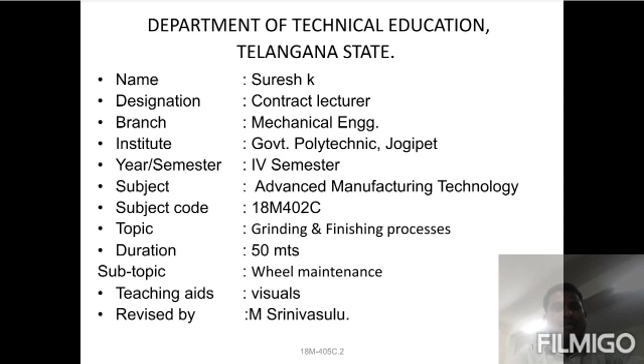Right now we will discuss the remaining topic in grinding. An hour before, we already discussed the maximum amount of this topic. Once more, we can check the entire topic again.

In the previous class, we discussed the grinding wheel, grinding wheels, and work holding devices. What are the work holding devices we used? Right now we will discuss the remaining topic of grinding wheel.

So first, an hour before, let's recap our topic. What is the work holding device? The work holding device plays a main important role in the grinding operation, because it maintains the work in a constant place for some amount of time during the working process, avoiding tilting and helping to produce correct surface finishing. That is the main important thing.

Right now we will discuss the types of work holding devices. First one is vices, second one is magnetic chucks - among magnetic chucks, one is electromagnetic and the other is standard type. Then long cylinder bars are also used to hold the workpieces, and centers are also there - one is the live center, second is the dead center. These are the main work holding devices.

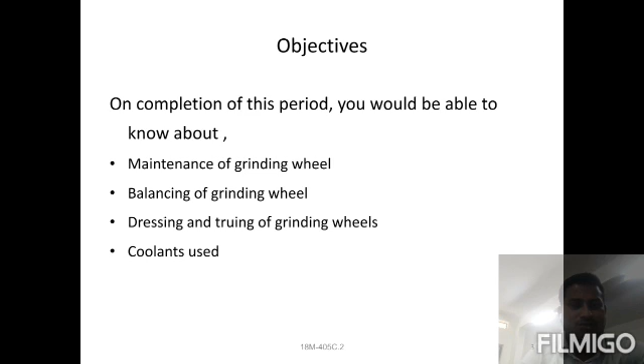First is the maintenance of a grinding wheel. What is maintenance? First, it is to improve the cutting capacity. Whenever cutting capability is reduced due to continuous usage of any grinding wheel, the cutting capacity will be decreased.

To increase the cutting capacity, maintenance improves the efficiency and life of the grinding wheel. This is done by removing the already used type of abrasive particles, which improves efficiency while revolving continuously, and at the same time cools the entire workpiece during the working process.

Next is to run the grinding wheel with concentric speed on the spindle. The grinding wheel is placed on the shaft or spindle, and while working it should revolve in a perfect way. This is the best example.

Consider a four-wheeler vehicle - after long usage of a car or motor, whatever it may be, what do we need? Wheel balancing is important. Wheel balancing or wheel maintenance is required for the wheel to rotate properly for the driver. The same principle applies here - we run the grinding wheel with concentric speed on the spindle.

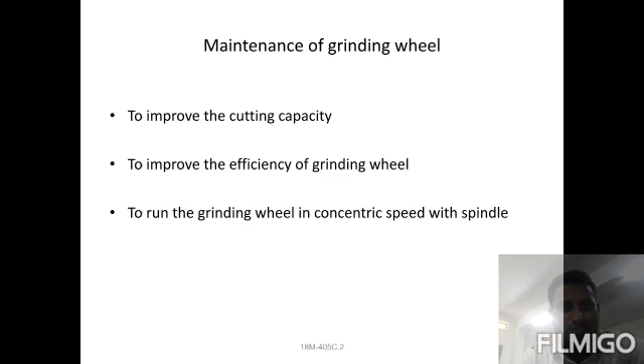Next is balancing of the grinding wheel. What is balancing? It is to prevent vibrations at high rotary speeds. The grinding wheel always revolves at high speed, so we need to prevent the vibrations that are generally developed in every machine, but we need to avoid them at high speed revolving.

While in the working process, the grinding wheel rotates at very high speeds. At that time, we need to avoid the vibrations and prevent them.

Then, to prevent waviness in the work surface - during the working process, some amount of waves will be created, along with uneven surfaces, uneven lines, or scratches. So to avoid that, we prevent the waviness of the work surface.

Next is to prevent the wheel from breaking. When does breaking happen? Due to continuous long usage and applying maximum force on the workpiece with the grinding wheel, there is some chance of the grinding wheel breaking. So in this process, we need to prevent the wheel from breaking.

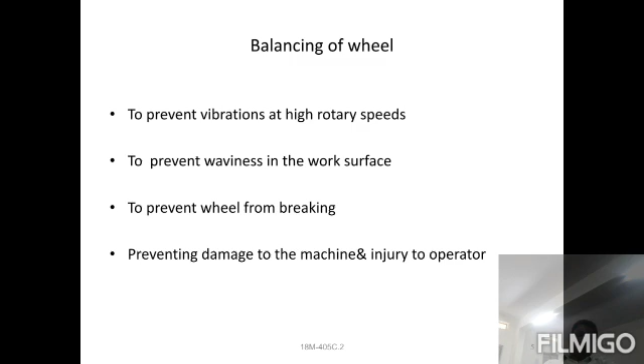The second one is balancing of the grinding wheel. A wheel is said to be balanced if its weight is uniform throughout. The weight of the grinding wheel is uniform throughout its entire body. The grinding wheel is provided in a round circular shape, with the maximum amount of material deposited in the manufacturing process. So a wheel is said to be balanced if its weight is uniform throughout.

If its weight is uniform throughout. If some portion of the wheel is heavier, then the wheel is said to be unbalanced. So we are discussing, is it balanced or unbalanced? If some portion of the wheel is heavier during manufacture, then the wheel is said to be unbalanced. So in this connection, balancing is the most important thing. That's why we consider this method.

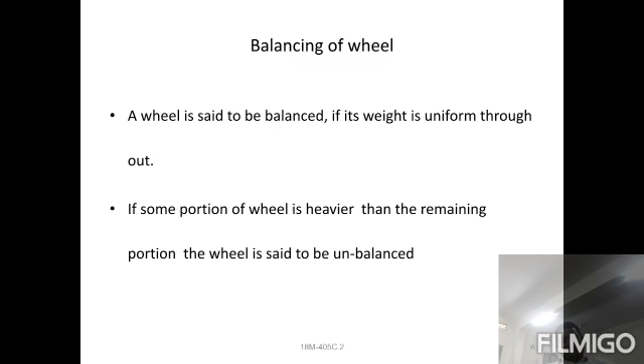Next, what are the methods of balancing? First one is adding weight in the form of lead to the light side, right? So to remove the chances of imbalance, add weight in the form of lead to the light side. Next, adjust the segments attached to the inner sleeve.

If the grinding wheel is unbalanced, we go with adjustment of segments, which are nothing but separate parts, separate attachments. We attach them to the inner sleeve of a flange. The grinding wheel consists of a sleeve and a flange, and the segments are attached to the sleeve of the grinding wheel.

Then, large wheels are balanced by pressing with rubber washers and flanges. So if large wheels are there, balancing of heavy-size large wheels is done by pressing with rubber washers and flanges. Flanges are used and rubber washers are provided.

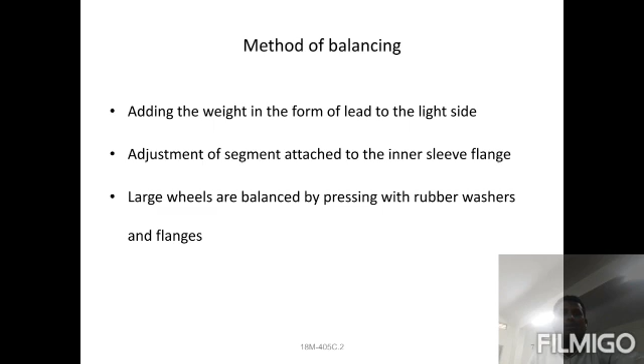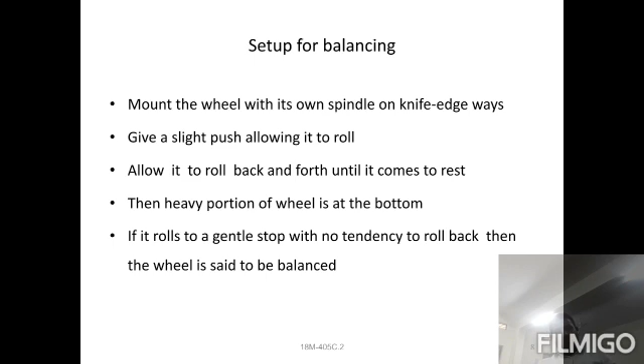Next one is how we set up the balancing of a grinding wheel. First, mount the wheel on its own spindle on knife edge ways. So mount the grinding wheel on its own spindle, provided for that grinding wheel, on knife edge ways. A separate base is provided for balancing purposes, with knife edges that are both parallel, right?

Give a slight push allowing it to roll on the knife edges. Allow it to roll back and forth until it comes to rest. Give a little push to the grinding wheel. It will move, then come back until it comes to its rest position, after we give some force to the grinding wheel with the help of its spindle.

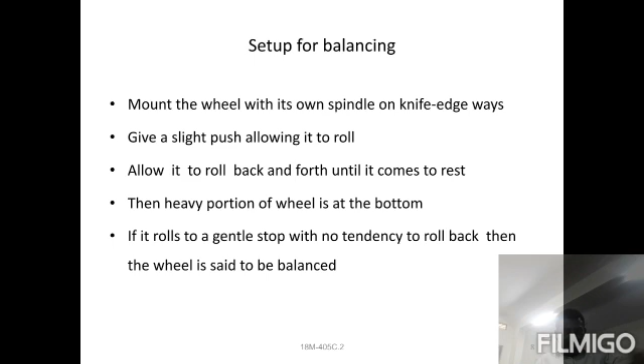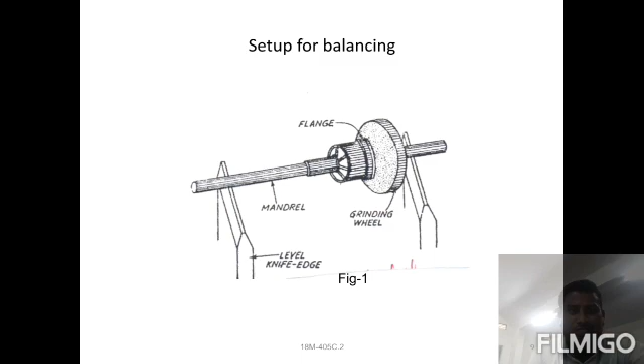If it rolls to a gentle stop with no tendency to roll back, then the wheel is said to be balanced. That is the main thing. For rolling, you can observe the figure here. Both are two knife-edged type bars, with the grinding wheel provided. The grinding wheel with its own spindle will be provided, and next, a flange will be provided for holding purpose. That is the main thing.

Then, while revolving, giving a little bit of push to the grinding wheel, what will happen? It will move easily. The mandrel is nothing but a shaft with the same diameter from start to end. On the mandrel, the grinding wheel will be placed and revolved by external force from a human being. That is the easiest way of traveling for any type of grinding wheel. So that is the main thing.

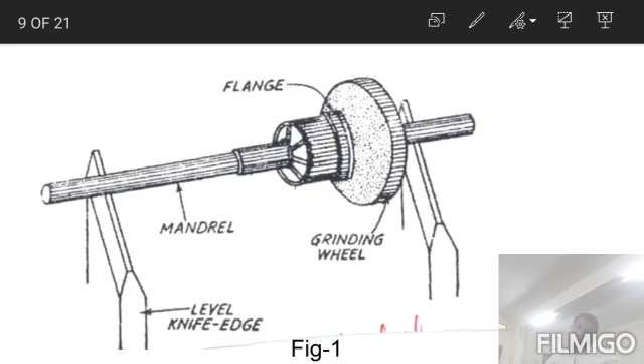So we can call it a balanced grinding wheel. If it is not in the correct position, we can call it unbalanced, right? Then next one, dressing. So how to dress? Dressing is the process of removing the already worn out or utilized parts of the grinding wheel. With the passage of time, the grinding wheel's cutting capacity becomes lower. Decreasing the cutting capability reduces the efficiency of the grinding wheel.

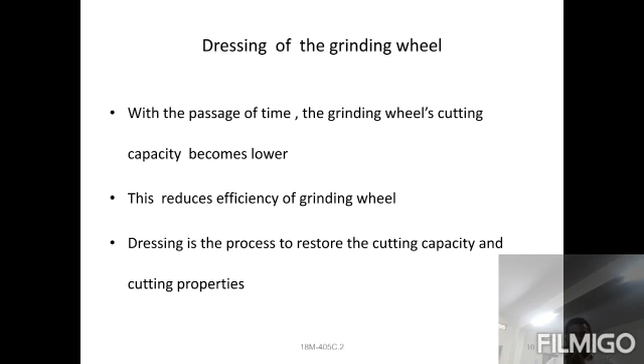Next, dressing is the process to restore the cutting capacity and cutting properties. Each and every material has some properties; here the grinding wheel's property is the cutting property. So dressing is the process used for restoring the cutting capability.

Next, metal or foreign matter that is loaded in the pores of the wheel is removed. Foreign matter means any other materials, right? Loaded in the pores of the wheel, it is removed. Then dull grains which did not break off during the operation are removed. So that is the main thing.

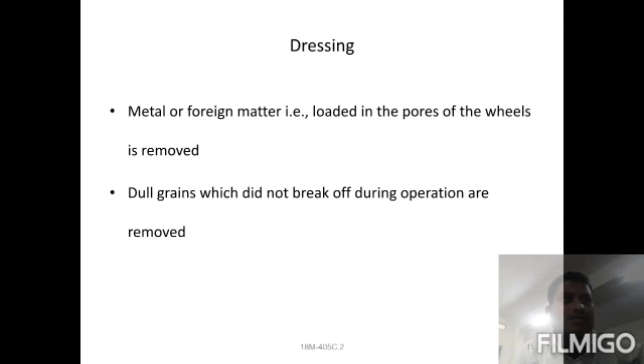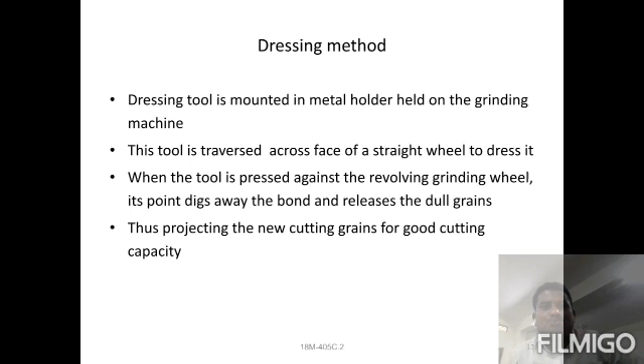The tool is pressed against the grinding wheel, right? Next, when the tool is pressed against the revolving grinding wheel, the tool will continuously be pressed against the grinding wheel. So that is the meaning.

Next, when the tool is pressed against the grinding wheel, its point digs away the bond and release the dull grains, thus projecting the new cutting grains for cutting capacity. The projecting of new cutting grains provides new cutting capacity. So capacity will always be increased. That is the main thing.

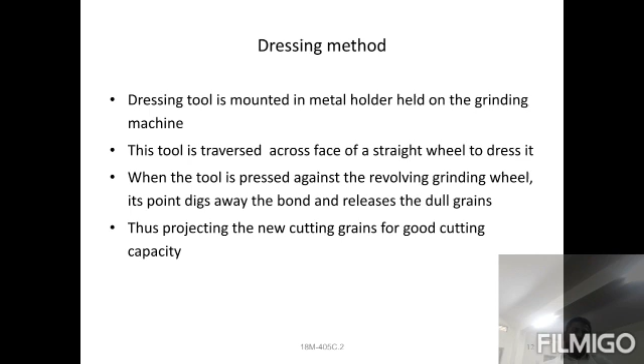So what will happen is, whatever amount of material is deposited in that grinding wheel from the work pieces, each and everything will be removed. So that is the main thing.

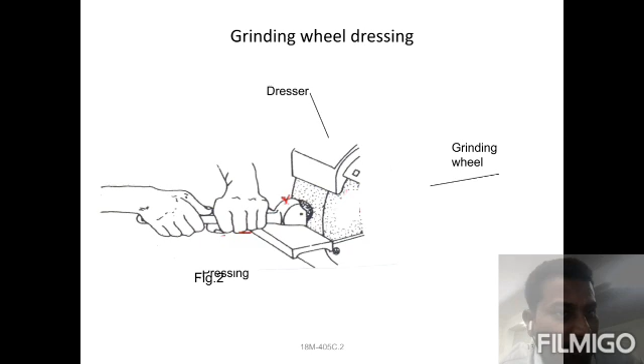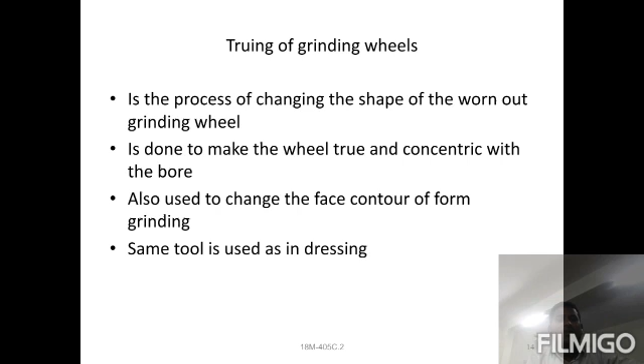So it is compulsory to make the wheel trued and concentric with the bore. It is also used to change the face contour for form grinding, right? Next, the same tool is used as in dressing. There is no need of any special arrangements. We are using the same tool.

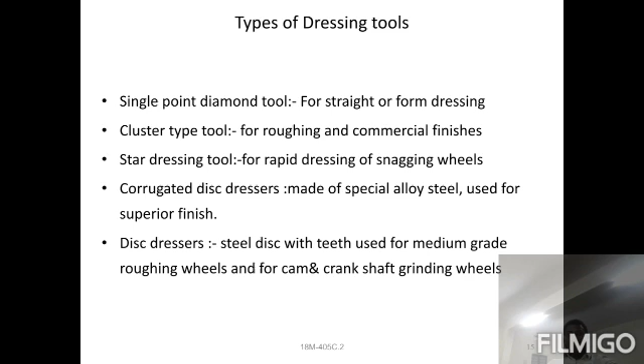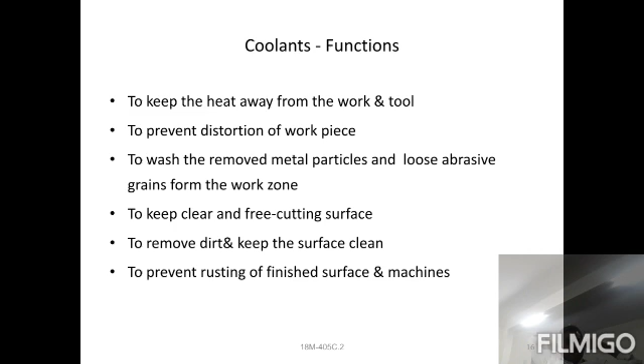And next, to wash away removed metal particles or loose particles. Coolants wash the metal particles and loose abrasive grains off the work. Then to keep the cutting edges clear and free cutting. And next, to prevent rusting of the finished surface and machines. So these are the main things.

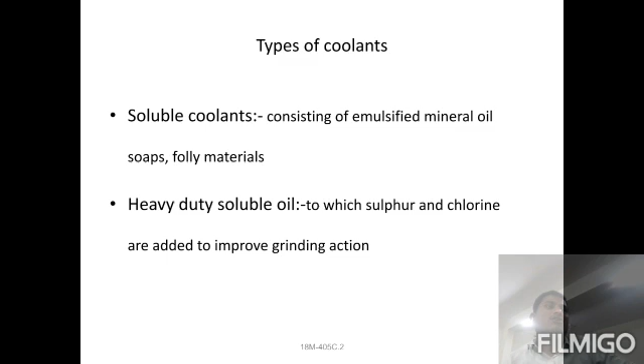What is the main function of coolants? Which types of coolants are available in the market? The first one is soluble oils, consisting of emulsified mineral oils or soap. These are the main soluble coolants. Next, heavy duty soluble oil, to which sulfur and chlorine are added to improve the grinding action. So that is the main thing.